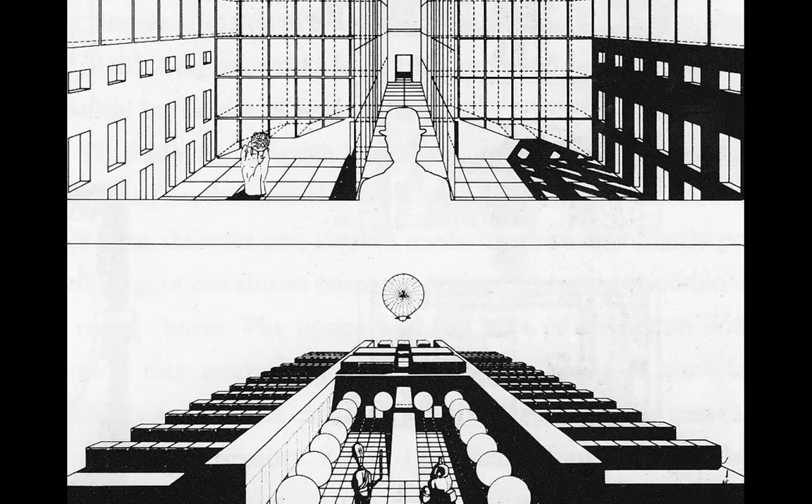I think most architects would not consider what we look at here as a rationalist architecture or as a rational architecture. Actually, I find it almost alarmingly irrational. So what I'm trying to say, if you use just 90 degree angles and right angles, doesn't mean necessarily that you are rational. You could be obsessed by rectangularity and the right angle, but obsession is not something that normally should be called or could be called rational. So you could be irrational if you are extreme in your choice of stringent straight lines and 90 degree angles and so on.

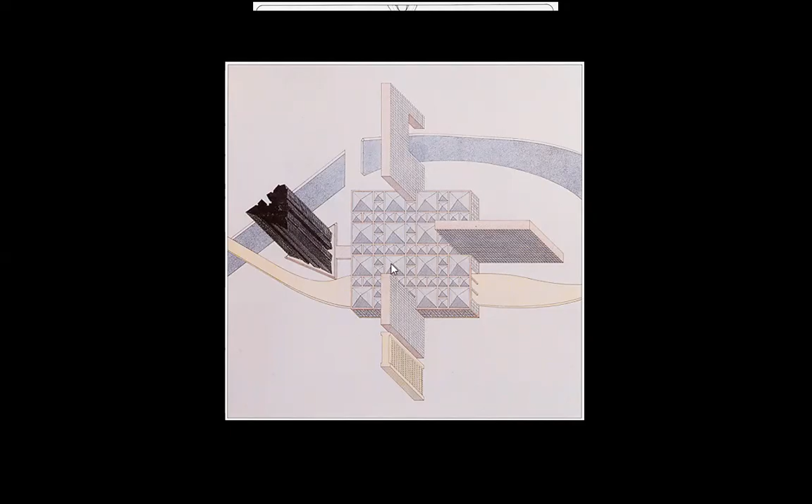Even here, what we see is actually only on the right side his work, but even this drawing is highly idealistic. Here is the project of Mies van der Rohe for a skyscraper which he didn't build in Berlin. So this part of this drawing belongs to Mies, and this is what Oswald Mathias Ungers proposed. But I don't know if he was a student, or I imagine he was a young architect at that time trying to have his voice heard.

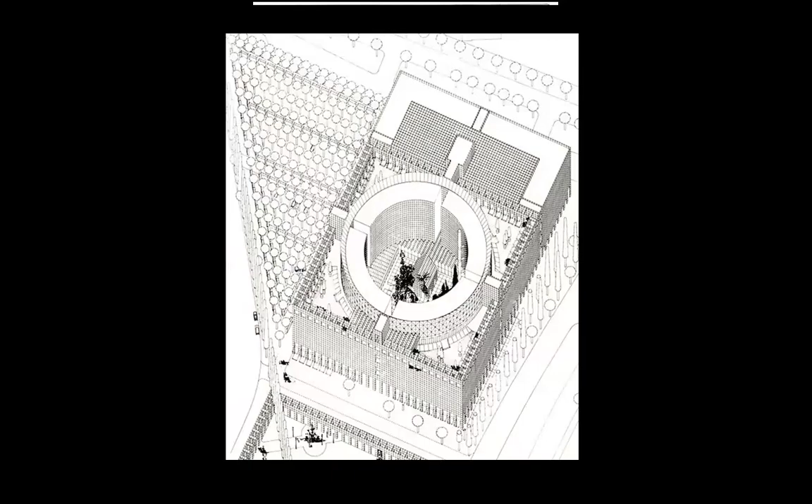Here again, is this a rational architecture? It depends what we understand by rational. Maybe a truly rational architecture is an architecture which is flexible enough and mature enough and wise enough to also accept so-called accidents, even some fluidities. Maybe that is a truer meaning of the word rational. If you are, in an obsessional way, concerned only with symmetry and right angles and so on, it doesn't mean that you are necessarily rational. You could be mad actually in a Cartesian mode.

This house, at the beginning, he actually built some houses which are more flexible and, in a way, more human, if I am to express myself in a non-academic way. 1958, 1959, House Ungers 1 in Cologne, in Köln, or near Köln, but no pictures. But we are going to see the next one here.

This house that Oswald Mathias Ungers built, it's even romantic in a certain way, and even the play with the volumes is not, usually when we think about a rational or rationalistic architecture, we think about a house that is inhibiting, but this is not an inhibiting architecture at all. And I find it actually very skillfully done, interesting, and more than acceptable. I think it's almost romantic in a certain way.

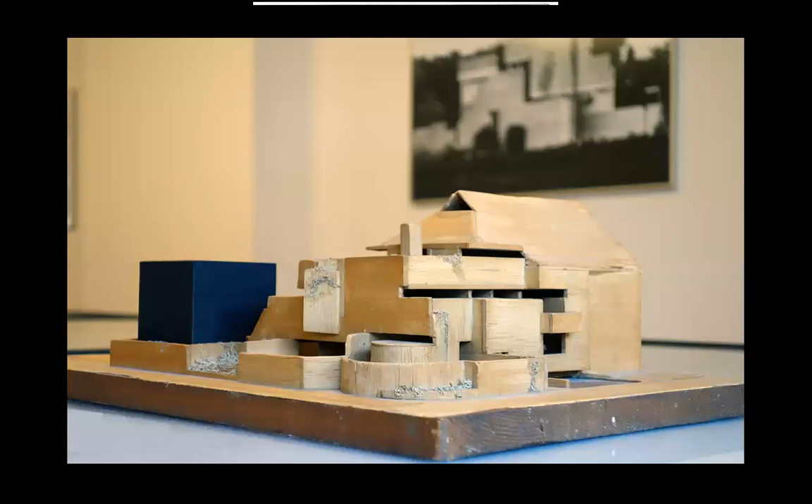Another house by Oswald Mathias Ungers. This one again is, I think, because the walls are woven with small constructive entities. And, yes, the geometry is as it is, but the diagonal is in itself a sign of rebellion, if you want, or innovation, or betrayal of the stringencies of the rational paradigm. I like this house as well.

And I think the early houses by Oswald Mathias Ungers show some promise, which maybe later became a little bit obscure. But even his later work, you are going to see, has values which make it not quite easily accepting the qualification of being rationalistic. We are going to see very soon what I'm trying to say.

These are fine houses that Oswald Mathias Ungers did, and they do show the skill of a talented architect, with a sensitivity which is maybe not so easily found even these days.

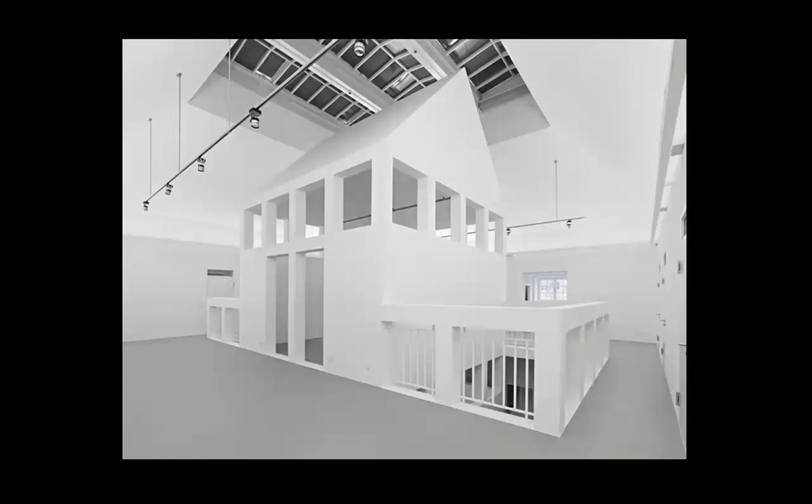It's an architecture museum, so we can talk about this too. What does it mean, an architecture museum? It's a museum which displays models, projects, which instead of being outside of the museum as real buildings, are inside the museum as often just that, projects. It's a famous museum, and it's too bad that it's so white, as you can see.

He built a house within a house, and now we are approaching that phase in his work where he is not any longer able to escape almost a metaphysical desire for symmetry and order and control, total control, which could have its positive aspects as well, but also negative ones. Again, we see the grid.

Again, in my opinion, this is idealism. It is idealism that is employing a so-called rational system of manifesting itself. But in essence, it's a quest for the absolute, for the infinite. It's idealism, but it's an idealism which could fall very easily into sickness. Maybe all idealism, if pushed too far, like Icarus getting too close to the sun and having his wings melt down.

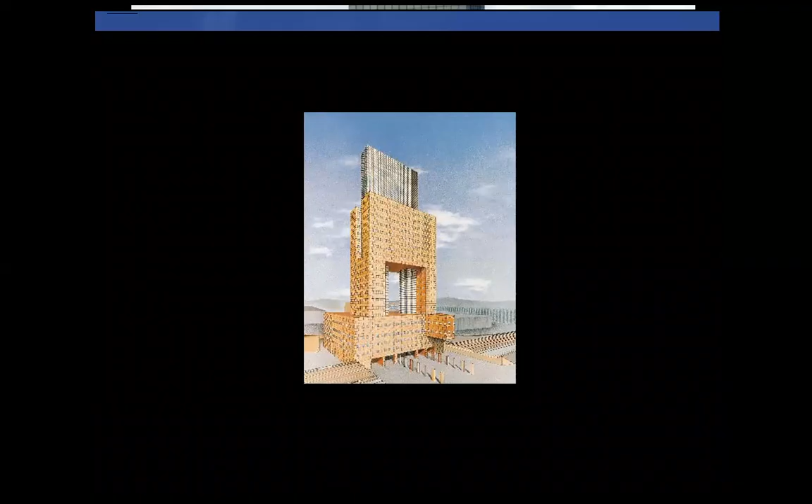It's a formal manipulation trying to negotiate between the democracy of glass and the imperialism, if I can call it so, the authoritarian attribute of the masonry wall at this scale, because it is an appreciable scale. I mean, I don't know, 15, 20 floors, and then the glass prism. And here is a rendering of this giant building that he built, giant for Frankfurt. Maybe for Manhattan it would not have been really giant, but still, it's a big building.

I don't think it's very gracefully done, but it's an architecture of intimidation, I would call it. I regret that he left the language of negotiating with reality more fluidly, as it was shown in his first two houses. But this is a public building of a certain dimensions, and what it misses is what Karl Friedrich Schinkel had, because if Schinkel would have used such a big building, he would have brought in some sensitivity that was

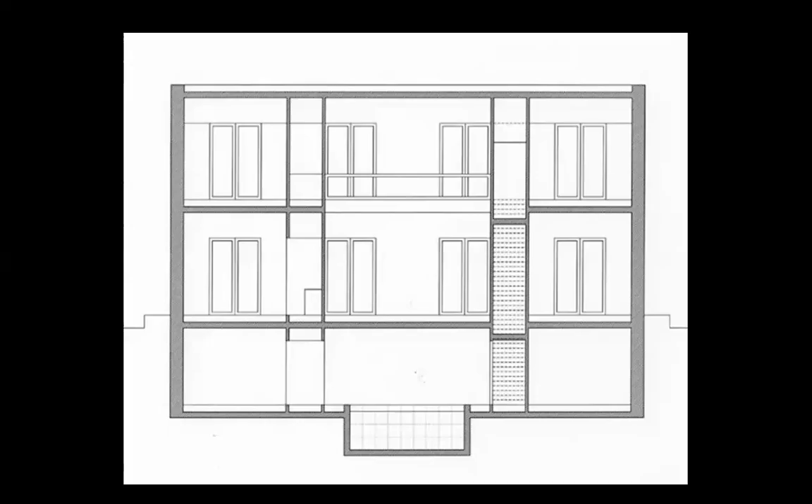I'm not sure, because even minimalism, if it is pushed to an extreme, it becomes the very opposite. Just as ice or snow appears to be hot when you first touch it, this so-called minimalism in its absoluteness becomes a maximalism, in my opinion. And you'll see the obsessional quest for the absolute, both in this section and also in the plan.

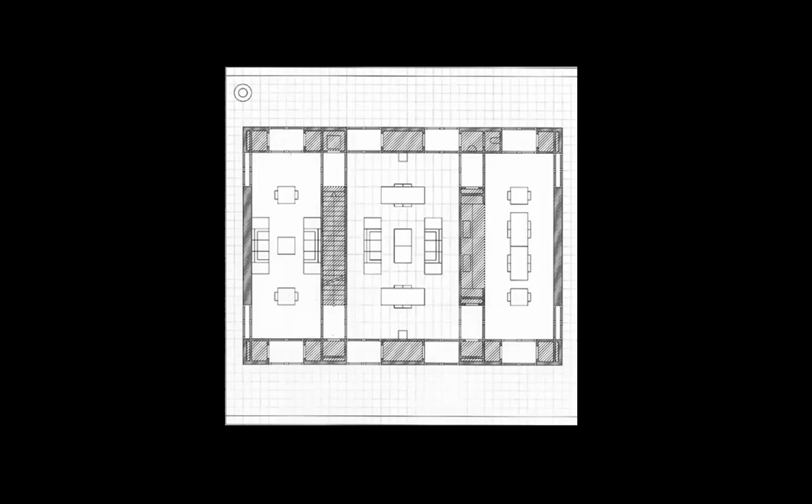Look at the plan. Is this a rational house? I would say it's rather irrational, although it employs straight lines and 90-degree angles. It's very pure in one way, but this purity somehow goes too far. I like this house very much because it is a house searching for the absolute, and it's crafted beautifully, and yeah, you could say you can barely breathe because it's so structured and so ordered, and everything is symmetrical.

But it depends. It could be seen also, as I said, as a quest for the infinite somehow, at the level of a house. And at night or evening and during the day, the house becomes surreal. In my opinion, it is a surreal house, closer to surrealism than to realism. Because who can say that the 90-degree angle is the real angle, the angle of reality, and the 89 degrees is unreal? No, not necessarily. It depends.

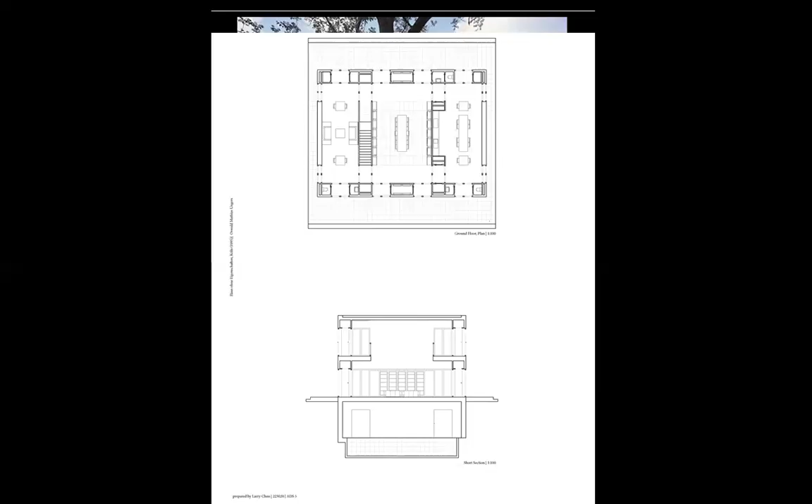I think it's a very intriguing and very interesting building. I don't know if I explained well what I tried to explain, but it's one of his best works. The Museum of Contemporary Art in Hamburg, 1995. Well, this cannot be anyone else but Oswald Mathias Ungers.

Again, is this a rational architecture? Not so sure. It's so perfect and so symmetrical that it becomes almost irrational. But you can take great pictures of it, even inside. Yes, squares, squares, but there is some kind of tornado of squares. I don't know how else to describe it. All these squares in the facade, in the interior space.

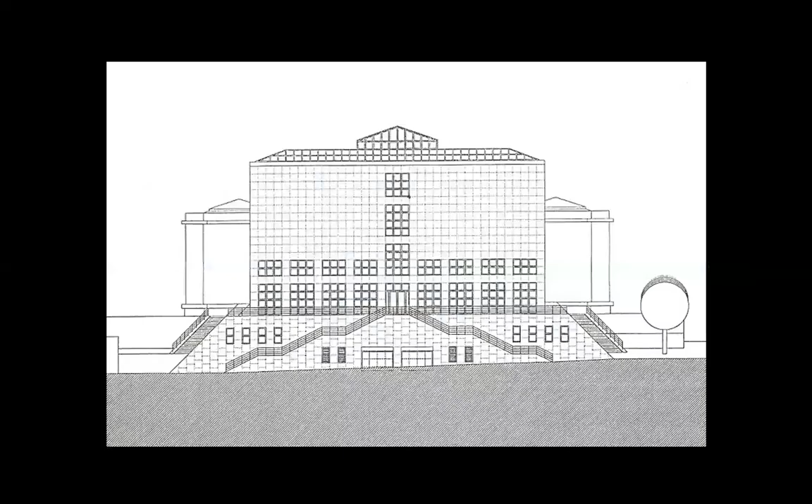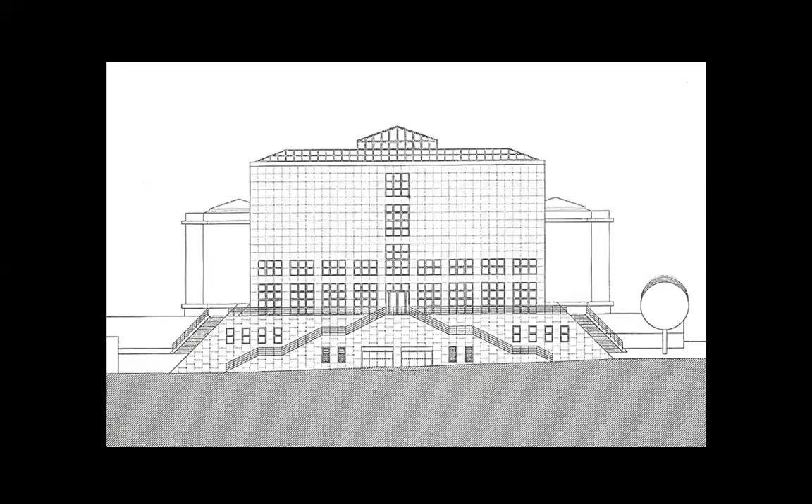It's a strange architecture in a way, you know. I mean, this is a big building, as you can see, a very big building, but also with some references to maybe not the gingerbread house, but to a certain kind of domesticity, because this kind of window, divided in small squares, refers to, I don't know, windows or doors that were done not with a large piece of glass, but made of small fragments, usually square.

And it's his way, I think, of bringing ornament in. It's an oblique ornament. It's not an explicit ornament. Maybe I can call it like this, an oblique ornament. And look, the building is huge. It's the Museum of Contemporary Art. And I don't know, there seem to be also apartments there, or I don't know what's going on there, because so many little rooms you wouldn't expect in a museum of contemporary art.

Yes, there seem to be apartments. But then I guess the windows are, I don't see, I don't understand. There are no windows here at the top levels. Could it be that I'm not seeing properly, or could it be that this doesn't belong to that same project? Maybe it doesn't. Although it is a square and it has a square courtyard, just like this. But where are the windows? Here there are windows. Maybe the first two floors belong to.

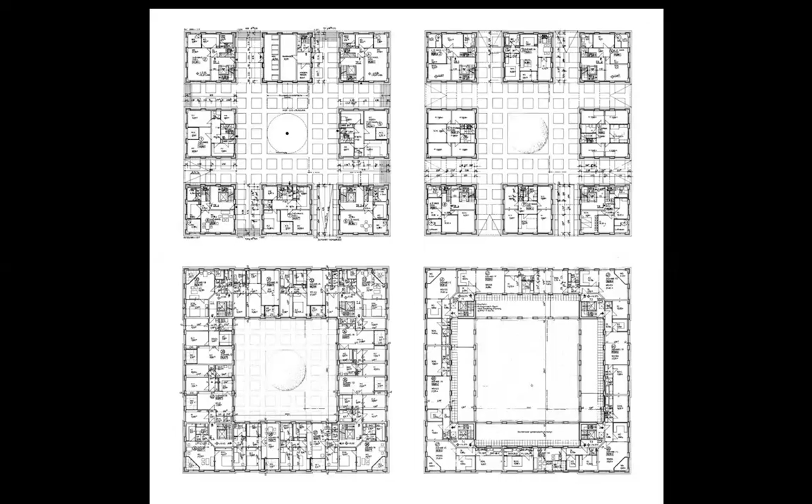I'm confused. I should have analyzed it more. In fact, I didn't analyze it before I ventured to make a presentation on the day when Oswald Mathias Ungers was born. But if I look at the picture with the building and I look at the plans, I'm confused. Maybe you are confused too. The fragmentations that are shown in the plan do not appear from the outside.

But this is a typical later work by Oswald Mathias Ungers. It's a building which infuriates almost with its symmetry, but it's skillfully done. You cannot say that this is a building you can easily ignore. No, it has power and it has refinement. And the inside is also, I would say, well crafted in its own way. It's architecture. Yes, it's not just building, it is architecture. Where is the art? Now, these plans look more like that museum, but what we saw with those apartments.

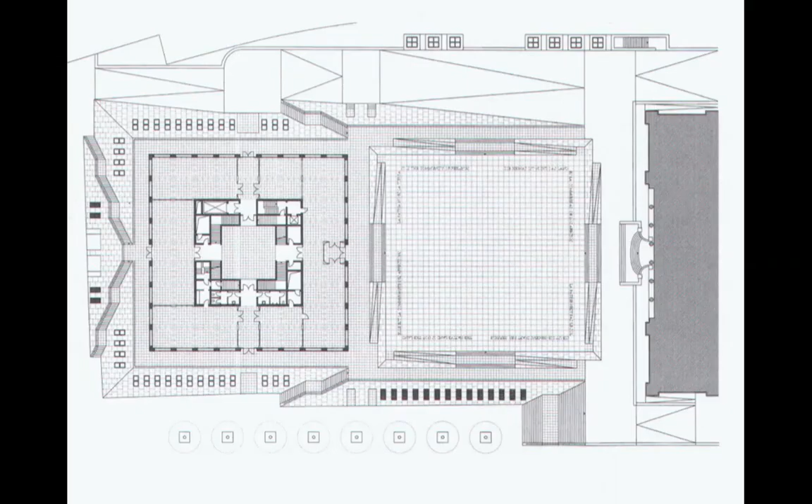Anyway, what's good with the internet is that, let's say you are interested in something, you can always plunge into the research, and you can discover mistakes in the presentation you attend, or you can develop more serious understanding of a certain topic. Really, we are lucky that we have the internet, because we can access so much information and learn so much by ourselves. We don't need professors and we don't need lecturers any longer, in my opinion, these days.

1998, 2001. I guess some kind. I don't know. I don't know German, so I should shut up. It's some kind of, I don't know. It could be an apartment building, or it could be some building with offices. It could be both. It's okay. No, it's still architecture, but anyway. Oswald Mathias Ungers. Now another museum in Köln, Cologne, 2001.

The assault of art on society, or the assault of society on art. I don't know what to say about these museums. Yeah, I appreciate the art that I see here, but the museum itself is a little bit intimidating. You know, is it the house of art, or is it the house which patronizes art? Maybe. Look at that huge blank wall. You know, it's a box. It's a white box. It's well done. It's well designed, but it's still a box.

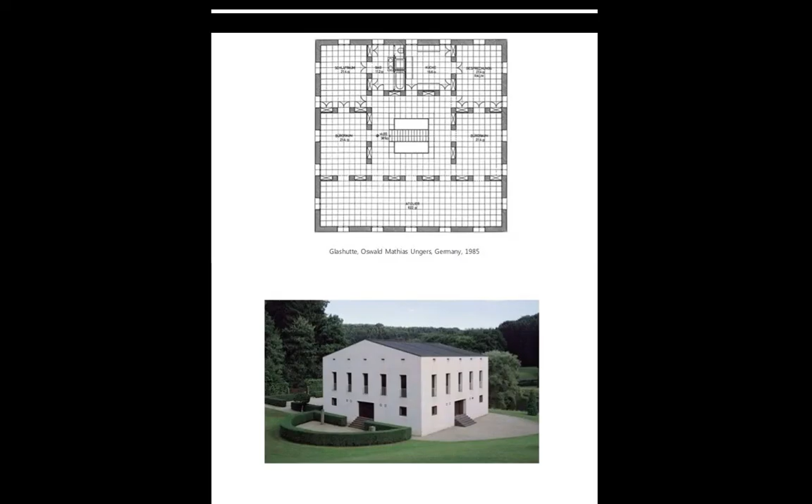It's another exercise in purity and idealism. Call it rational idealism, although it sounds oxymoronic. Look at the plan. We are going to see the plans in better pictures. So it's a villa, a villa with nature around it.

But look at this facade. I think it is as perfect as a painting by Giorgio de Chirico. I consider it surreal, but it's also an exercise in following to the extreme the lessons of the Renaissance, perhaps, in modernity. And we'll read a little bit later, in one minute, some words he had about this house.

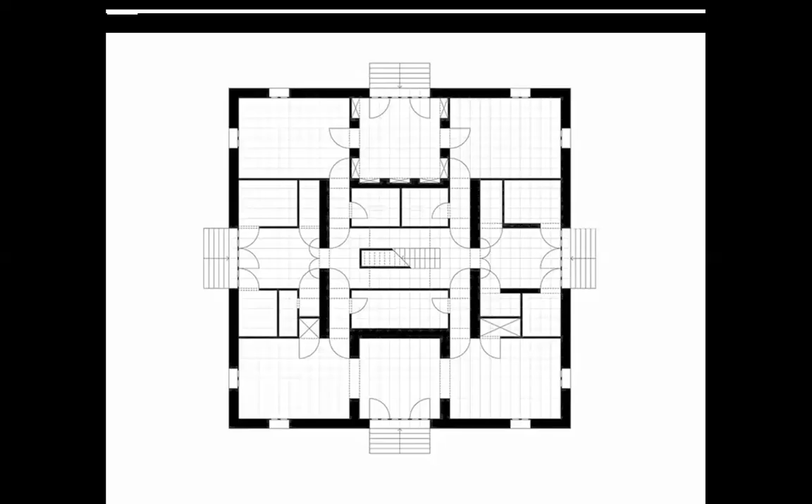Well, inasmuch as possible in modernity. But it does have a level of purity and the strength of following an ideal. And I think it's a good building. And this is the second floor. Oswald Mathias Ungers. It's a big house. I mean, you see the dimensions of a door. It's a big house, but he handled it, I think, with grace. And this is not easy at this scale of a house.

Sometimes I wonder, can't we do projects again like Andrea Palladio did? And maybe even like Oswald Mathias Ungers did for this house, meaning just a plan, a section, or several plans, several sections, no perspectival drawings, no perspectives, and no renderings. Nothing, just black and white drawings, Euclidean drawings, bidimensional drawings, nothing else.

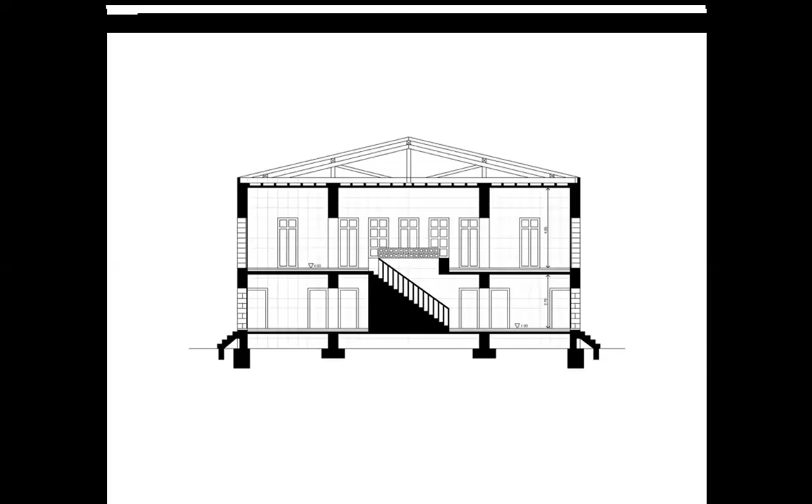So perspective was already invented, but he didn't use it, with the exception of the Teatro Olimpico, but not in terms of representation, I mean in terms of drawing, but in terms of construction. Maybe it would be interesting to return to a simpler mode of representation where we reject any kind of theatricalization that renderings are so eager to employ.

I think renderings do a disservice to architecture, because when you do a rendering, you try to be seductive. You place seductive human beings in front of the building, and seductive expensive cars, and these seductive tumultuous clouds in the sky, and seductive dramatic trees. So you don't know any longer how the building actually is.

But with such drawings like the one we look at now, it's a different thing. It is what it is. You get what you look at. There are no disturbances here. This is the building. Architecturally speaking, this is the building.

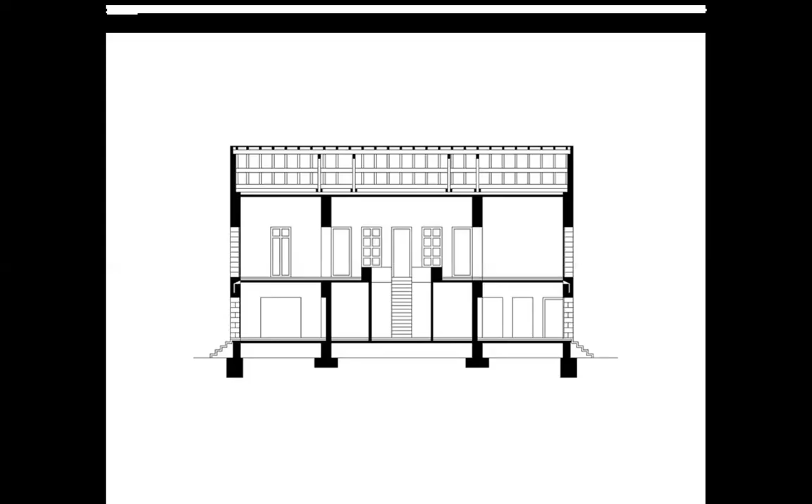The house is a living space, laboratory, test, and representation of the idea of the world. Oswald Mathias Ungers. This very statement shows that he was questing for some kind of an ideal. He didn't use the word ideal, he used the word idea. Laboratory, test, and representation of the idea of the world. So not just of the idea of the house, but the idea of the world.

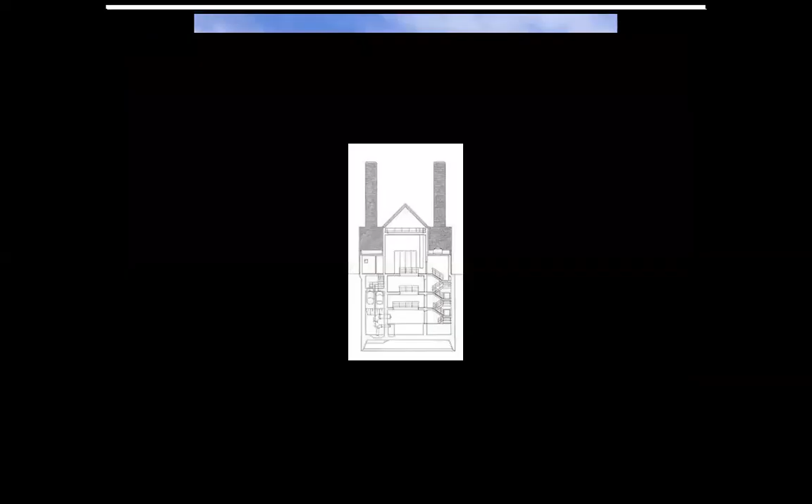So if you stared at these green doors of Oswald Mathias Ungers, and then you moved your eyes towards a white wall, you probably would have seen them exactly like they are, but red, not green. But here we have the redness in the building, in the walls, and in these impressive, I don't know, are they chimneys? Are they pumping fire, or what are they pumping? Whatever they are pumping, I think it is an interesting building. Again, a little bit diagrammatic, a little bit infantile in its assuming geometry, but it's not a building that you could easily forget. Sorry about the resolution of this section.

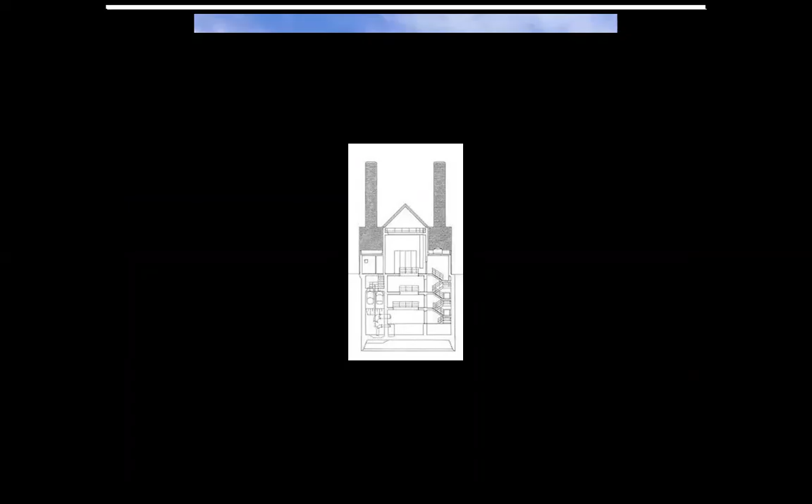By the way, not pumping, but incinerators. Incinerators, I suggest to you to study the incinerators built in Australia by a very interesting architect, Griffin, who built a number of them, and they are very, very impressive. Also with very tall, well, in that case, they are chimneys. I don't know here what is the function of these vertical things. I see them above the staircase, at least on the right. Maybe they are still chimneys. I'm not sure what they are pumping, but since it is a pumping station, I guess they are pumping something.

Anyway, the redness itself is an event in the work of Oswald Mathias Ungers. I don't know if you know, in European alchemy, apparently the main colors used are black, well, it's not really a color, but let's call it that for the sake of this short presentation, white, and red. And apparently the alchemist begins the alchemical process with blackness or nigredo, then he goes through whiteness or albedo, and in the end, he has to reach rubedo or reddening.